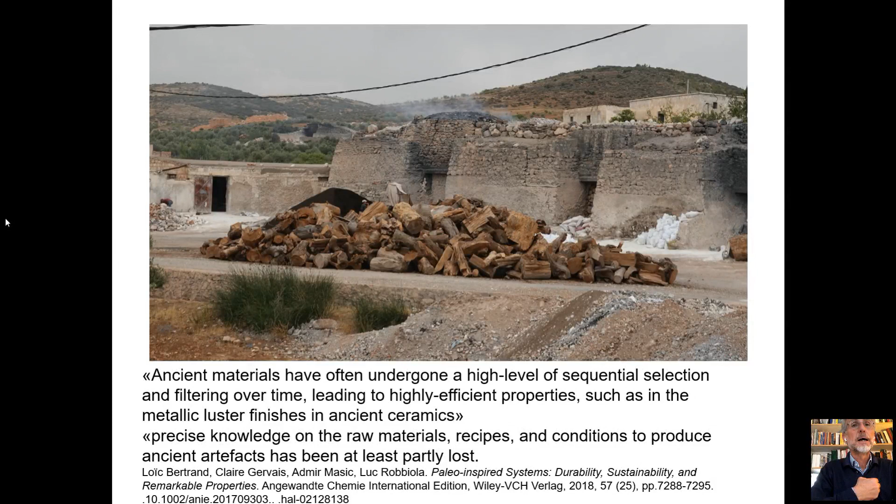You see the kiln here. It's producing, it's burning limestone, and this limestone is made with a selection of stones.

So you look at the stones, they look to me exactly the same. But then you speak with these people and they explain one stone is good for making plaster, the other one is good for making mortar. And you look at the stones, they seem exactly the same. So there is some knowledge behind that, which results in products and artifacts that are unique in quality.

What we learn is that in every place and region, builders take advantage of local materials and knowledge developed throughout time, and maximize benefit from their use. This approach has distinguished past building cultures, particularly before the advent of modern building culture and modern society. Working with heritage has the benefit of dealing with a less sophisticated building industry, offering chances to approach building traditions which have not been corrupted by the current building industry.

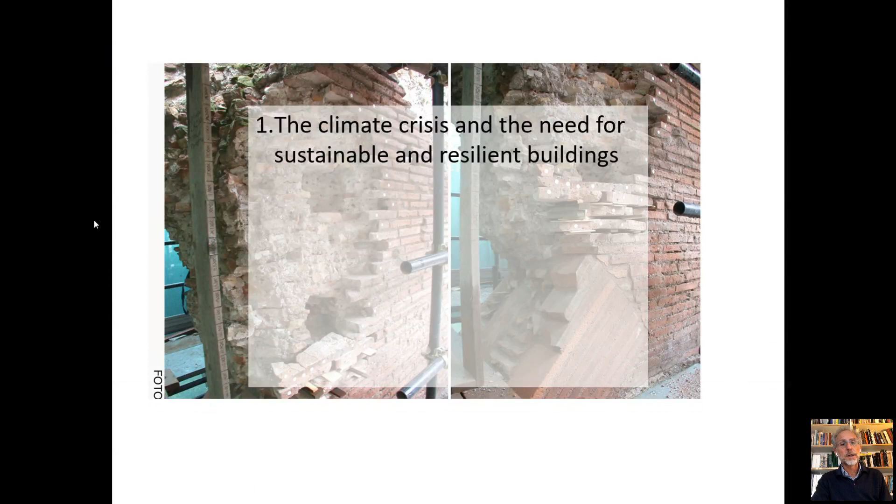The second point is the example of historic buildings as models of sustainability. There is a very famous statement of an American architect that says the most sustainable building is one that already exists—we will come back to this statement. The third point is the tools to analyze and understand historic buildings. I will show you how we are approaching this topic.

In the last two centuries, there has been a change not only in our mindset in terms of materials. Think about the faith in strong binders for construction—cement is fabulous, fantastic—against weak binders. When I say weak binders, I refer to the fact that, if you work in archaeology, you know humble construction, vernacular construction, is made with earthen mortars, with very little lime and a lot of earth, and this distinguished past building cultures. Today the faith is in strong binders, and this is one of the reasons.

Our mindset has also changed in understanding the role of artisans and craftsmen. In the past, the construction of a house depended on the craftsmen—they were the ones doing the building. Today, it's the architect who is doing the building, and the name of the craftsman has completely disappeared.

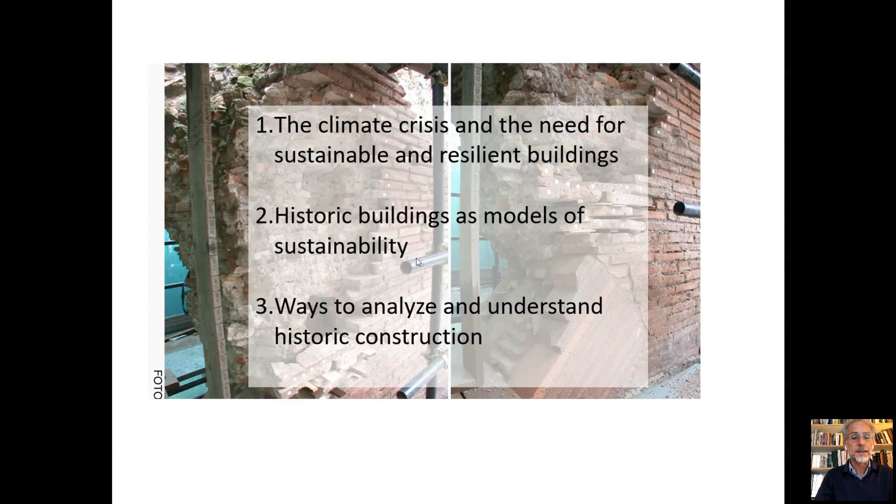The architect has generated processes where the artisans are excluded from the project. Architects, to keep the lead, have generated complexities and procedures, as you can see on the screen. These are some of the many procedures you need to go through to make a good building, in order for architects to control the building process through certified procedures.

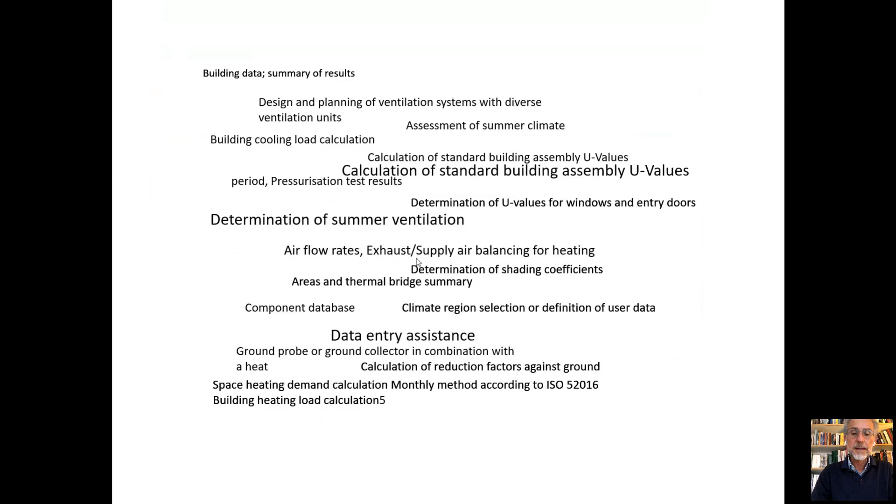In the 17th century, a single plan was all that you needed for the construction of a house in London. This is incredible—this is the contract for the construction of a house in 17th century London.

In many other cases, vernacular architecture was the product of the community itself—the community was working together to achieve a result.

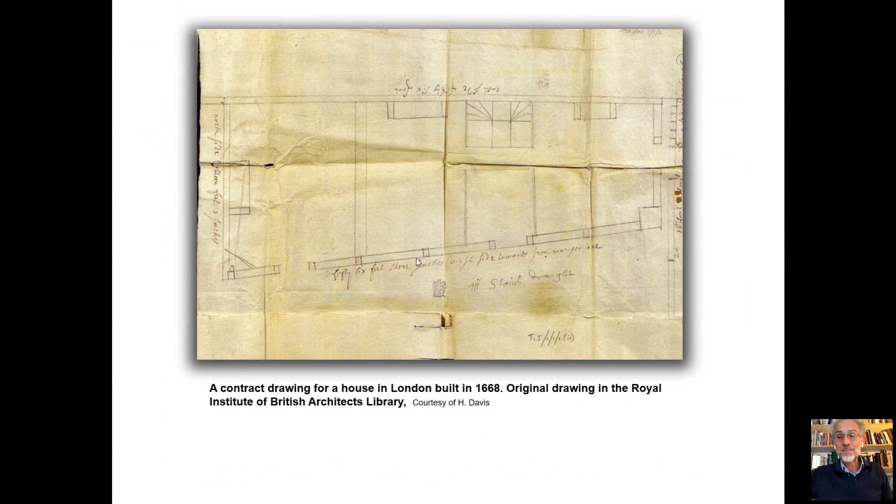So craftsmen have lost their role. Whatever building you may find in periodicals, artisans are hardly mentioned as those who, with their experience and know-how, have contributed to the final result.

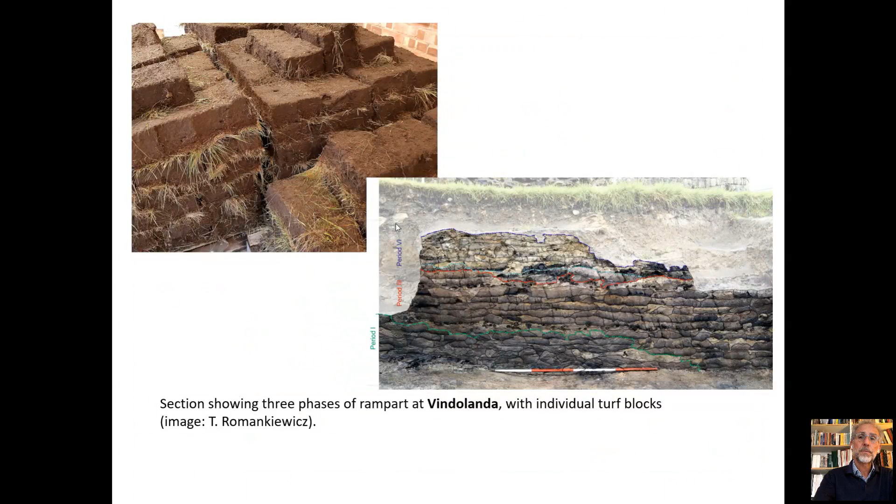Other examples are found in every archaeological place or vernacular site that has not been touched by the current building approach. It's made out of earthen material, local materials, and all this expresses something against what we consider the take, make, waste culture that developed after the Second World War.

When people started to take advantage of the increase of energy due to the fact that fossil fuels were used to produce energy, they started to take materials in a more and more massive way to transform them for building their environment, and at the end of a typically short life, to waste these materials. So this is the take, make, waste society, which of course is not confined only to construction, but expresses today our whole style of life.

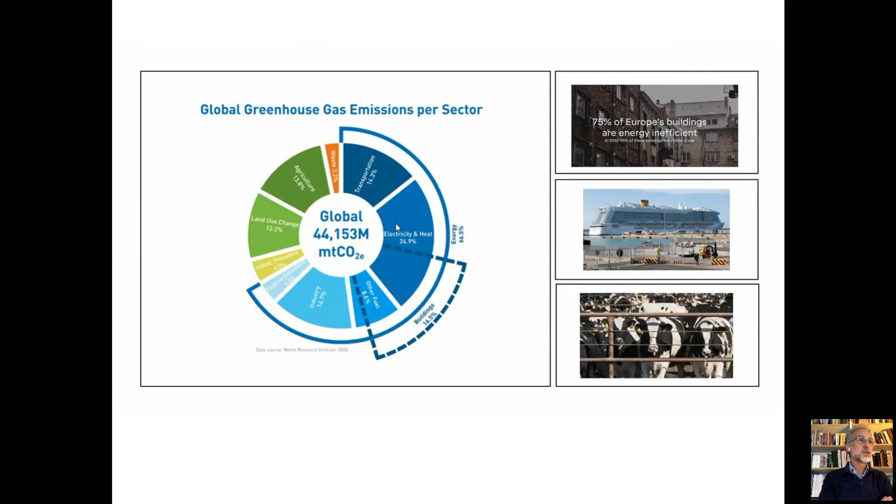It is a more sustainable approach needed. It is a global issue which cannot be tackled only through technology. It has to be tackled in many ways. I will show the case of the typical need you have if you want to repair a house. You say, I want to repair the house according to traditional knowledge, using low energy technologies, as for instance mud brick, and I say, okay, I will do that.

But then, as in the case of Khan in Mudurnu in Turkey, there is this guy who is keen to preserve one historic house in his village, and the problem is where to go and take the materials. Where is the best clay to be used for construction? This is the intangible knowledge that we have lost, because the local people of the village knew about the materials through a very long experimental process, they learned how to use these materials.

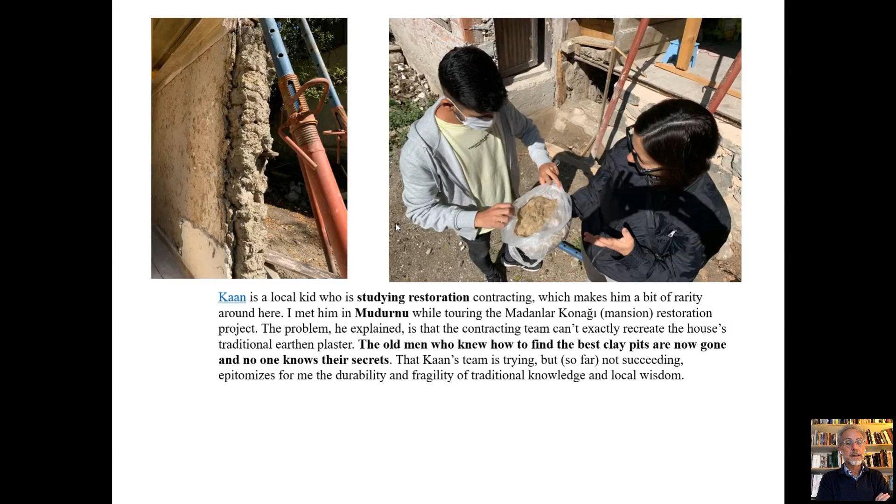So it is clear that we need to reconsider all that, not only the tangible part of heritage, but also the intangible part, and be aware that traditional building processes were based on material resources used in construction from local places.

So this is the statement that the greenest building is not the one you see made out of glass, because it's a matter of what we call life cycle assessment. The materials you are using, how much energy they needed to be produced, how much energy they needed to be transported and transferred to the place, how much energy they need to be dismissed.

In traditional construction, materials were local and developed solutions that were consistent with the environment, also in terms of climate comfort. Think about, for instance, in Cyprus, the traditional houses made with mud bricks, and consider that a mud brick construction, once abandoned, the material is naturally reabsorbed into nature without the need to dismiss it.

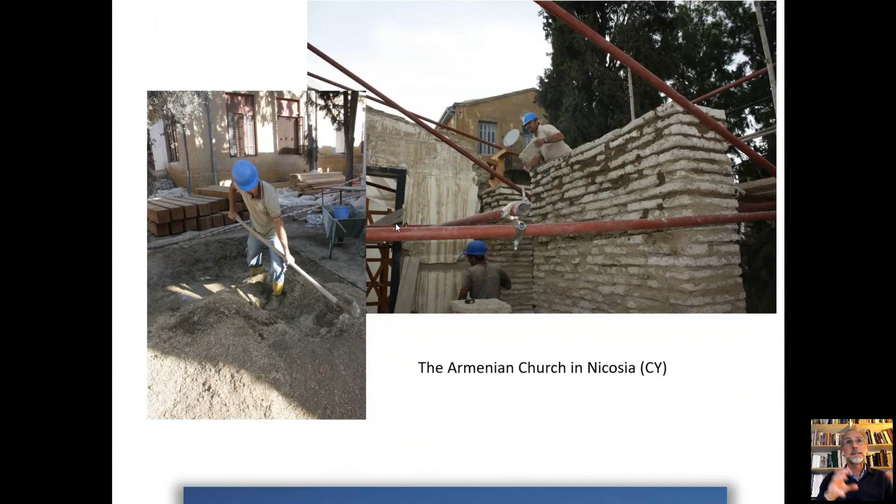It's a matter of rethinking how you can use all that. So this is what happens today: you build and then you demolish to build something new. Lifespan 30, 40, 50 years against the 100, 200, 300 years or more of traditional buildings.

Among the many negative and critical issues that need to be urgently addressed are mass-produced materials, low-cost materials, short-term life cycle products and artifacts, high energy production processes, long distance sourcing that increases transportation, design that disregards functionality, and individualist design approaches that aim to glorify the designer even to the disadvantage of the user.

So this is what happens today: the architect prevails with ideas to express his own role, against the fact that an architect works for the people who are going to live there. So I would say I'm rather critical with my colleagues.

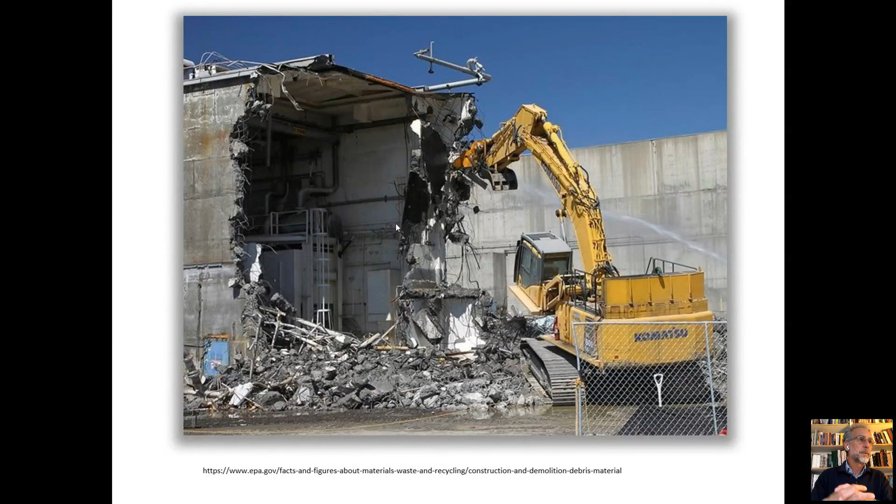At this point we need to understand the way we can use the knowledge from traditional buildings and how to transfer that into contemporary architecture. This is something we are working on. As you know, there is not much traditional architecture currently in use in the building sector. Local materials are not used; there is a lot of import from faraway places.

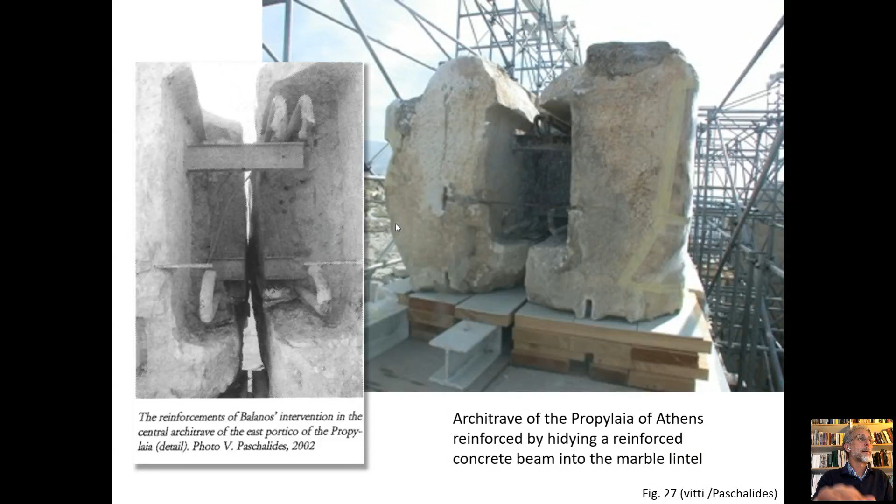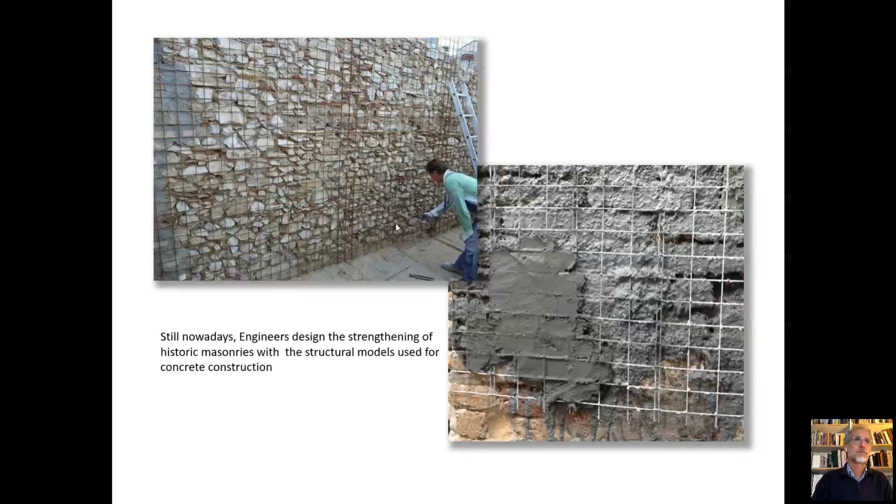It is clear that according to this idea by Paolo Marconi and Antonio Giuffre, restoration could play a very important point in recovering past knowledge. But we want to go even beyond that. Because of the climate crisis and the need to change current approaches to architecture, we understood that we need to take preservation not only as something used for preserving our past heritage according to traditional building methods, but with an active role, so the knowledge we get from preservation works can pass to current buildings, as we were saying about the Armenian church in Cyprus.

One of the ways to do that is to approach local building traditions through an intensive work of analysis, documentation, and interpretation, going beyond the limited variety expressed in the manuals.

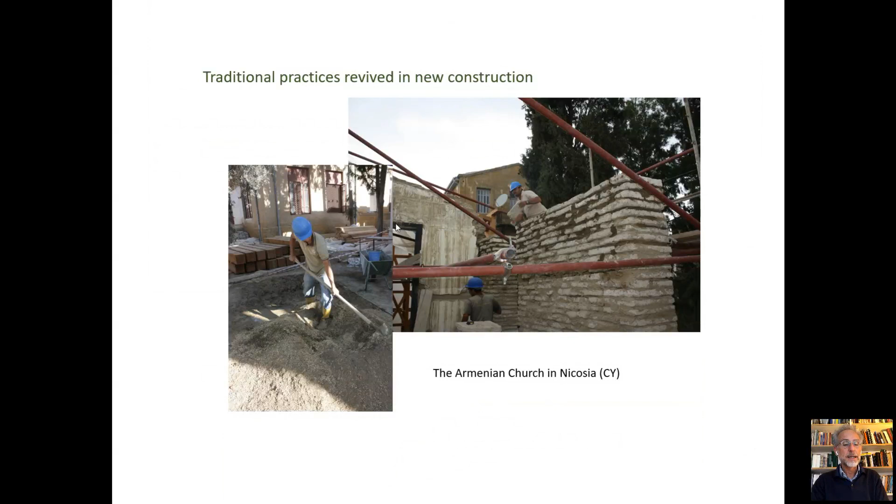This experience can only be captured through understanding local variations, because manuals tell you this has to be done in a certain way to be appropriate, but there are hundreds of ways to adapt a building to its local situation.

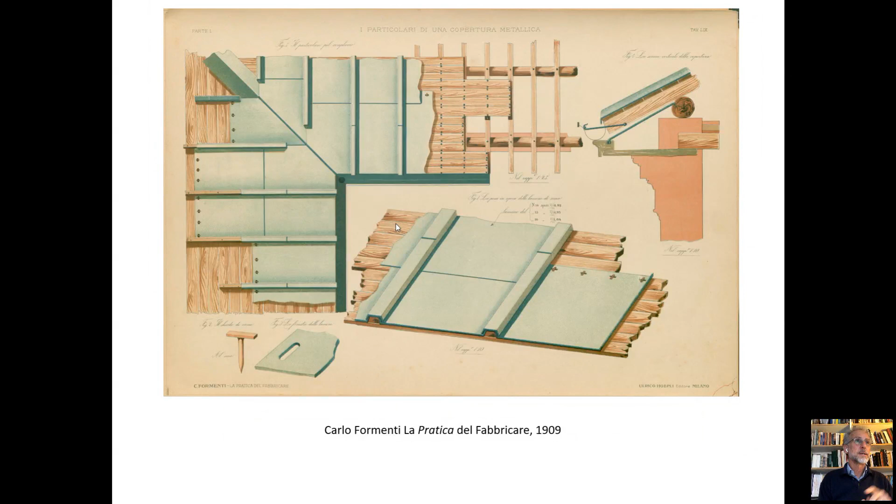These buildings show what we call variations of vernacular architecture. That is to say, there are some rules for construction, but there are variations developed locally by experiencing the local materials. So it's a matter of starting to think from a global dimension toward a more local dimension.

We are interested to understand how these local traditions developed in a place, and through what? Through a trial and error process, and how we can use that to redevelop this kind of knowledge. As we depart from the principles of current unsustainable construction and its dependence on strong structural bonds like iron and concrete, vernacular practices become meaningful, showing us how they achieve sound construction using weak structural mortars.

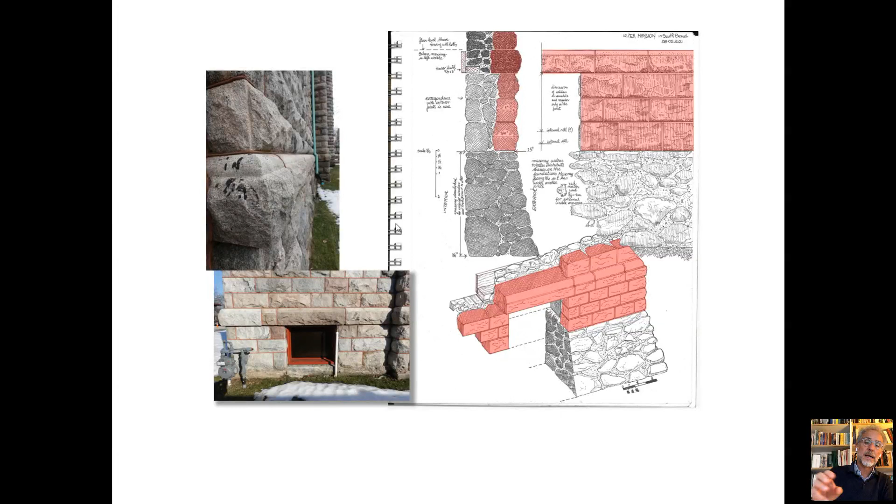If you click, there should be something showing the way the analysis is done. Unfortunately the screen on my end is very small, so I cannot see much from my phone. But if you click, there must appear the analysis of the contact points between the stones. On the left you see a stone construction, and on the right you have the analysis made to understand this local construction.

Panos, can you click and see if some dots pop out in the slide? Okay, very well. We see the red points, and the blue indicates a big stone. You see, the big stones are placed in the lower part of the wall, because it takes more effort to place bigger stones in the upper part.

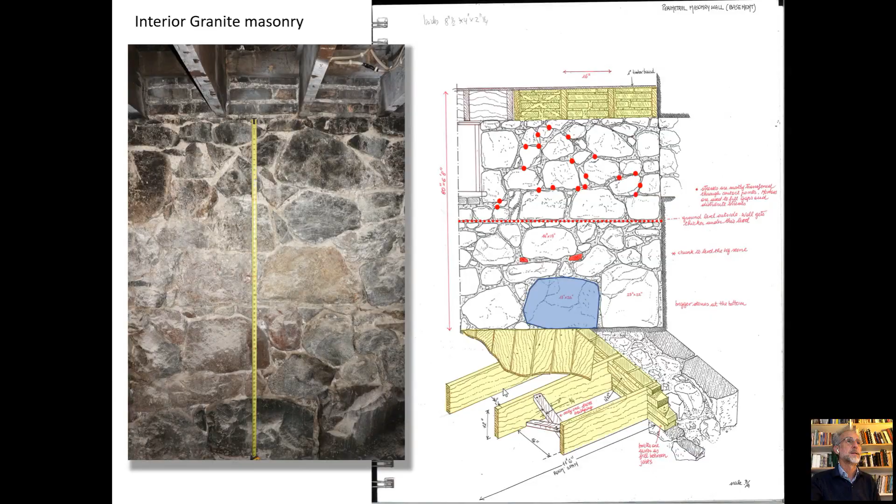Here is another example, this time about a Roman building in Sorrento. The analysis is made in a similar fashion, showing how we understand which materials were selected for construction. This is typical in ancient and traditional architecture: you select the materials first, then use them in the best way possible for the aim of construction. For instance, in Roman vaults, you use lighter tuff to develop a smaller thrust on the vaults.

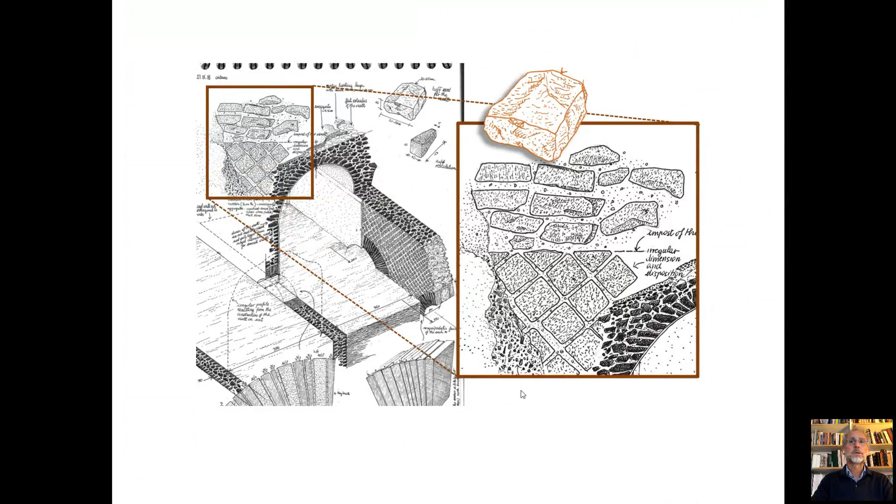So we look at the materials, the way they were transformed and shaped, and at the same time how they were assembled. By doing so, we enter into the construction itself. This is how drawings become a fundamental tool for interpreting and understanding historic architecture. The graphic analysis of construction, using the cognitive process activated by hand drawings, shows building elements in a critical way, which is of paramount importance if we want to recover building traditions that are lost.

This is where building archaeology methodology becomes fundamental, which is the way we analyze historic buildings today. In building archaeology we develop diagrams, reasoned drawings, which allow us to enter into the history of the building and into the building culture that originated it. All this needs training young generations—it's something we need to invest in. We have lost our capacity to analyze, and we need to absolutely go back to understand all that.

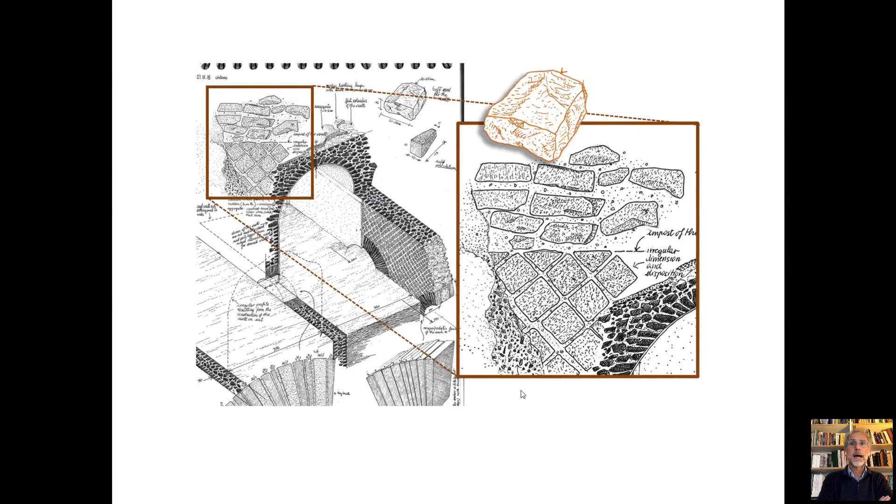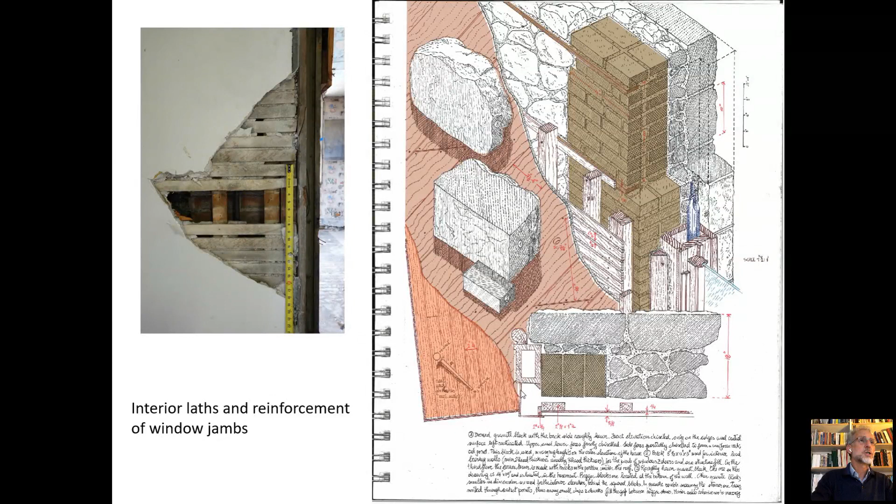This is one more example of construction. If you click, you see the analysis of the floor, including the dimension of the nails. If you click again, you see the use of bricks in the corner of the opening because they need to strengthen the windows. Then timber elements are used—this is in Indiana, a very cold climate. Clicking again shows the interior laths in yellow, timber elements which create a cavity between the masonry wall and the interior to insulate it and create more comfort in the house.

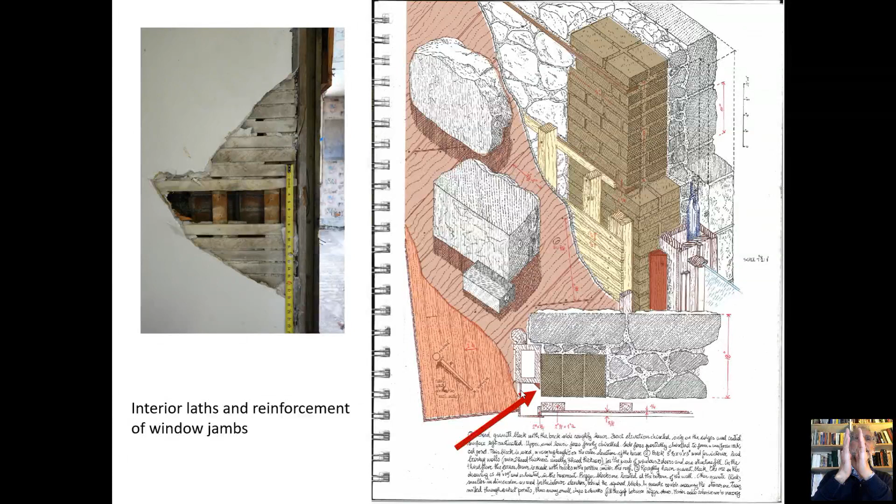Finally, it's very nice—if you click again, you see where the arrow is. This is the way they were sealing a seal between the frame of the window. This triangular element is a timber piece which fixes horse hair, allowing no wind or air to pass through the joint between the window frame—a sash window—and the masonry. This is the way you can analyze all that.

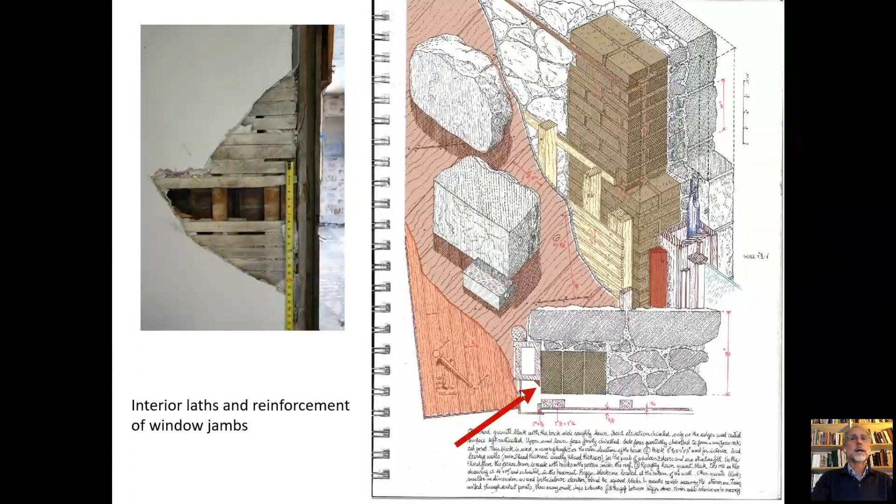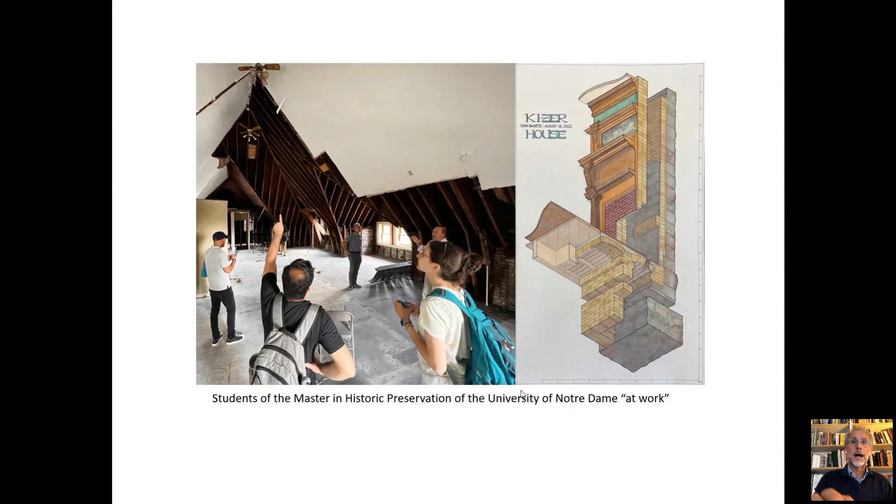To conclude, I would like to offer you something extremely important. Some of you might know the Faro Declaration, a very important document made by the Council of Europe. This declaration is about the participative role of the community. It's not only a matter of training experts and professionals, or having a building industry and codes needed for more sustainable architecture—it's extremely important to have the active role of the community. People need to understand, and the best way to do that is to disseminate the contents of heritage.